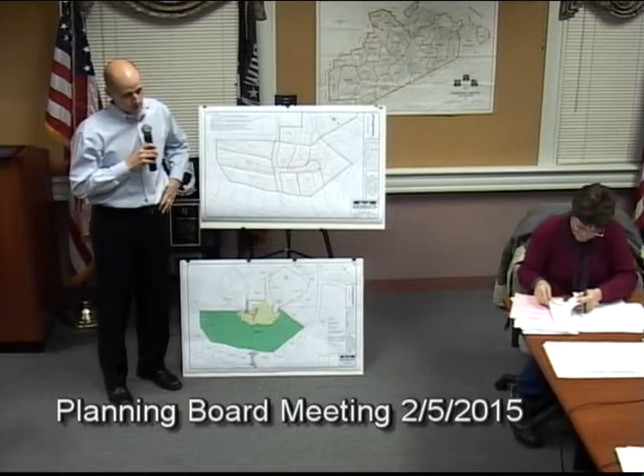We've gone ahead and looked at 3 more options in addition to that. It's a combination of conventional options and open space options, and also a combination of through roads and non-through roads. I'll go through one by one, and then we can discuss. If you have any questions about a particular option as I go through, feel free to ask.

Option number 2 is a conventional plan, but it's 9 lots instead of 11 lots. The way we could justify that is we're able to eliminate one of the roads, the road that parallels Mountain Rock Lane.

Taken into account here is the assumption that we'll be able to go with some of the low-impact development construction techniques that we talked about at the last meeting. Reduced pavement with integral bituminous berm instead of sloped granite curbing, going with roadside swales instead of catch basins — things you've done on past projects that allow infrastructure costs to be lowered, thereby offsetting some of the lost value with the lots eliminated as part of this proposal.

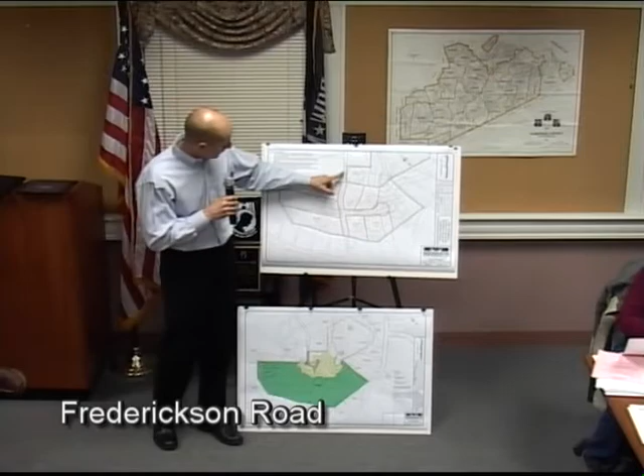This does involve a through road connection from Oakview to Frederickson. It's the same Road A. It's a slightly different version of Road B, with the lot geometry a little more roomy — I changed the orientation of that road a bit more to follow the top of that ridge out there. But it's essentially very similar to the preliminary plan we filed, minus this road stub here.

Okay, that's option 2. Option 3 is an open space concept.

This is about as tight an open space development concept as you could come up with. The open space bylaw basically allows us to go down to 20,000 square foot lots, averaging 100 feet of frontage with a minimum of 50 feet in any given lot.

Obviously, the areas we'd target for open space preservation are the wetland areas in the northeast corner. There's an isolated wetland in the northwest corner of the property. Because of how your bylaw is written, the percentage of wetlands in the open space parcel can't be higher than the percentage of wetlands in the existing parcel.

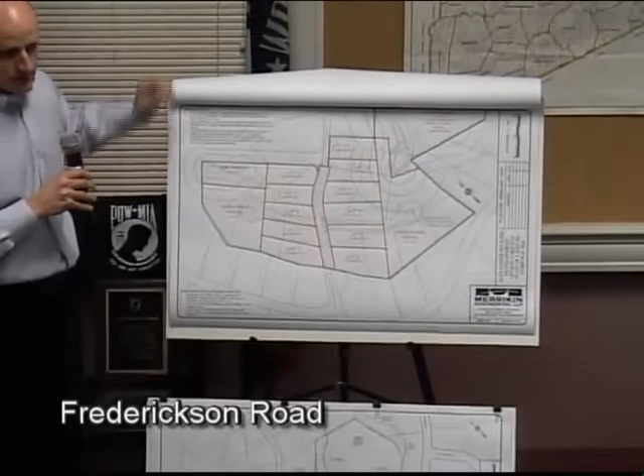So we'd have to carve those two off by an ANR plan first before we did this, and set them aside. They'd be excluded from the development package — just a set-aside, unbuildable parcel of land, both of those. Then what's left would become the open space parcel.

Here we just have 1 through-connecting road, no stub roads, and we have 11 open space lots, with an open space parcel to the west and also an open space parcel to the east.

Taken in total, nearly 60% of the total 17 acres would be set aside outside of lot development areas as part of this proposal. Again, this assumes we'd be implementing low-impact development techniques for the construction of the road — reduced pavement width, bituminous berm, roadside swales, things like that.

We'd be looking to decentralize our stormwater management patterns. Would anyone other than the people living in these houses access this open space? We could implement trail easements. We could also implement some access strips if needed, in fee. One of the two could certainly be implemented into this particular plan.

One of the restrictions with the open space development, and I mentioned it last time, is that the applicant was not really keen on the open space development concept. They weren't thrilled with smaller lots and a more congested development.

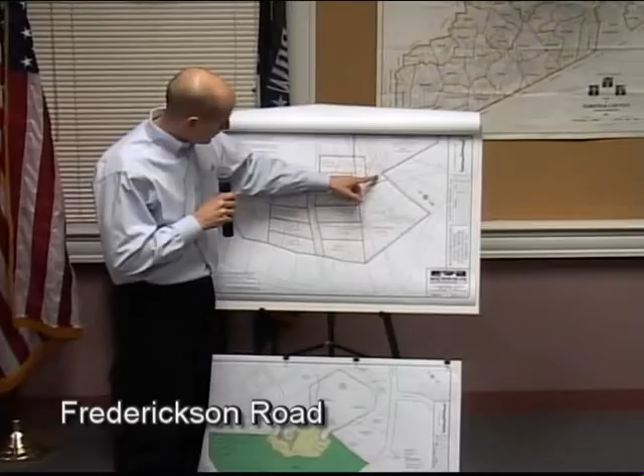One of the things we have to contend with in open space is a mandated zoning setback to this surface water body, which is an old farm pond. There's a 200-foot structure setback to that, shown here as this green line.

So we're not able to put a structure inside of that green line, which means lots 10 and 11 become constrained. The house would need to be close to the street. It'll work and it'll fit, but it is a constraint we'll work around because it's a mandatory provision of the zoning bylaw.

The third option is what the board asked us to look at specifically last time, a disconnected road system. We have an existing dead end at Oakview Trail, about 200 feet long, a little less. We'd extend that another 300 feet to make a total 500-foot long dead end on Oakview Trail. Frederickson Road, as we know, is already a long dead end.

We would extend Frederickson Road about 315 feet further, ending up with two dead end roads that don't meet. We would need to do this because of the geometry, and it would have to happen as an open space parcel development.

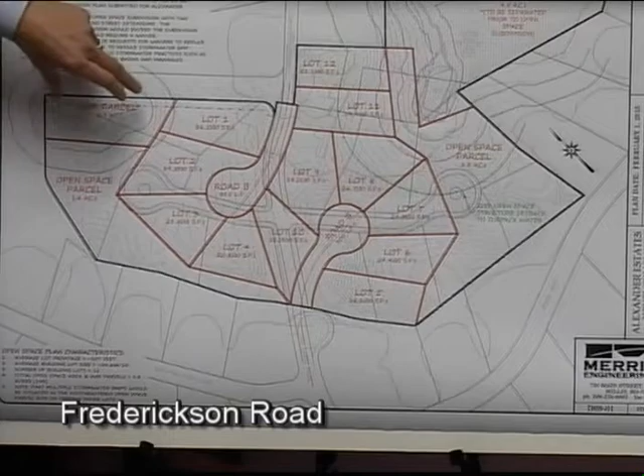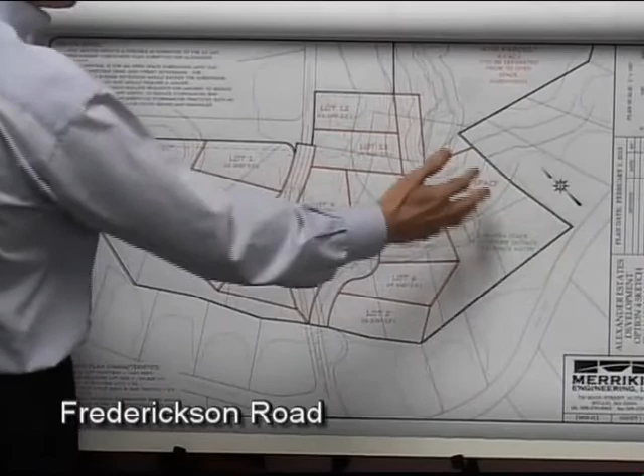So it's the same concept as option 3. You would carve out the two wetland areas as ANR lots, not part of the subdivision package, and have an open space parcel on the west and one on the east. We can connect those to the roads, tie the water main systems together through the two roads, and we could do an emergency access between the two roads if the board felt that was necessary.

So this is the fourth option, and again you'll see the green line constraining structure placement on lots 8, 11, and 12, but it works. It just means those particular houses would need to be probably 50 feet from the street or so.

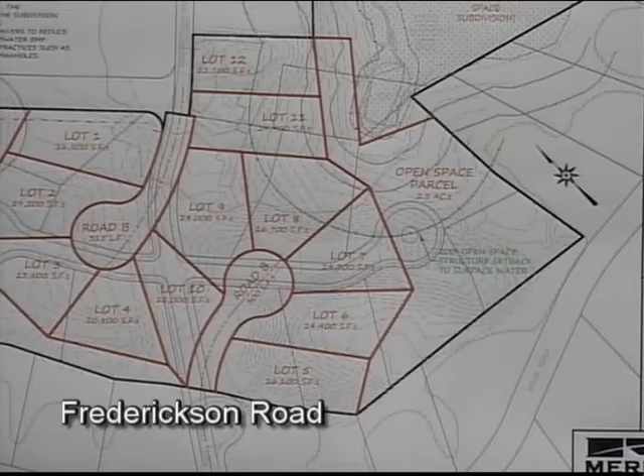You don't have a combination of the two cul-de-sacs and an open space. How does this come in — I'm not talking about that, the two cul-de-sacs. I'm talking about the original two cul-de-sacs.

Well, if you're going to open space, that's where clustered zoning would work best, on the two cul-de-sacs, because it's set aside from all the other neighborhoods. It's not just a straight row where you're going to all of a sudden get a dense area.

So you're saying have a through road and have two cul-de-sacs out, and then cluster on the cul-de-sacs. It's a possibility, but I'll tell you this area is not conducive to a cluster area because we have the wetland here.

There is some rock up here, so this would not work, but this area certainly would work to that end, which is kind of how this evolved. This type of configuration could be done as an open space configuration, certainly.

I think really the threshold issue we need the board to give us very clear direction on, and there was a lot of discussion approaching this, is whether it's going to be a through road or disconnected cul-de-sacs. That's the crucial issue that drives the design and gets us to a point where the applicant can make a decision on how to proceed.

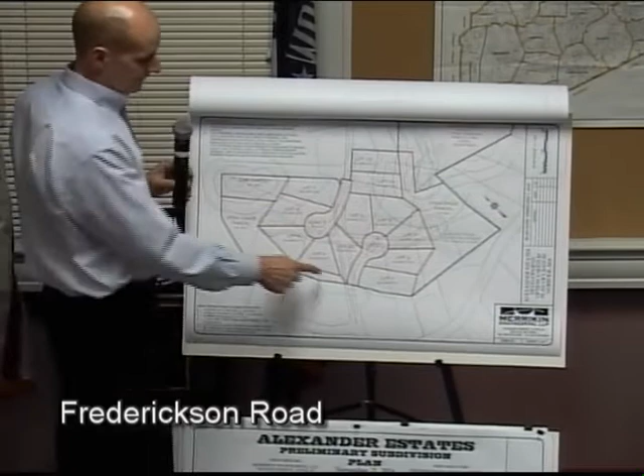So you're talking about basically reversing the road concept - making road one longer, coming in to the space where it's more level so you don't have as many cuts and fills, and then the Frederickson one, make that sort of capture all of the level graded area and even make the cul-de-sac bigger to put more homes around it.

So that kind of gets at the question John's poking at indirectly - which of these plans, including the one John suggested, has the minimum impact on the current topography? Well, the one that has the least impact on the current topography is option 3, which is just a through road.

Because it doesn't involve coming out into any of the lateral areas with any road work. You're talking about the open space through road concept, just a road connecting Frederickson to Oakview. There is no road work out here. The topography here is nothing crazy - it's just this ridge here that's the difficult part, and it's not difficult topography to deal with.

It's all sand. So this would have the least amount of impact in terms of earthwork, but the most traffic-wise, because you end up with a 3,000-foot road.

Again, this is where it comes down to the board needing to give us direction - there are competing interests here. I certainly understand the interest of the neighbors and abutters, but there are also public safety issues, and the board really needs to tell us which way the town would like this to go so we can decide which way to pursue.

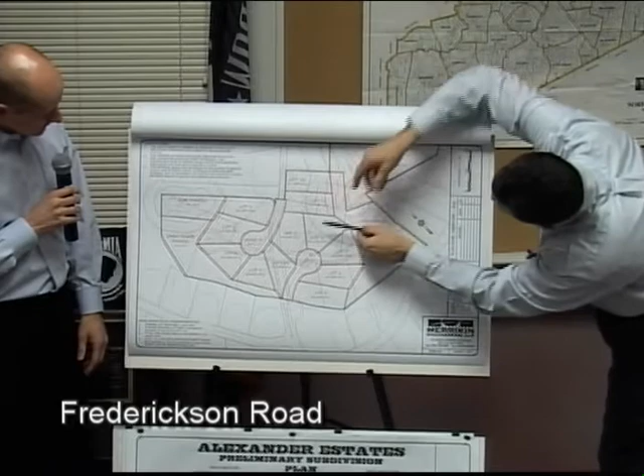So in terms of where the high ground begins, that ridge starts right about here, and it runs right through here. This is the ridge. So coming at it from Frederickson, this is really where it begins on that side, correct?

Correct, yes. So in terms of being able to put some type of roadway in here, you're saying this becomes - we can't have a structure inside of this green line. So a house has to be set back from the road a certain number of feet, I think it's 50, under the open space. And so we're constrained by that green line, and that's not something that we have any wiggle room with.

So what type of structure can't go in there? Any type of structure. Is that a conservation commission thing? Subsurface? No, I believe the bylaw intends to mean houses and sheds and things like that. Drainage, I think drainage could go in there. And it's 200 feet within what? It's 200 feet from the surface water, which is the little pond that's there. And whose bylaw is that? That is the open space bylaw, the zoning bylaw.

I'm just trying to look at this because if I was one of the folks living on either side, the biggest priority to me would be the excess traffic, the cars. And combined with the two different widths of roadway - you're gonna create a roadway with a 60-foot right-of-way that's all clear, and you're going into a 20-foot paved area that's all wooded with mature trees right to the pavement. So if you drive down there, you'll see that you've only got - as our consultant said at the last meeting, it's just a chance for people to get up ahead of steam coming out of Mountain Rock and going down, and having a sight distance problem as the road narrows in.

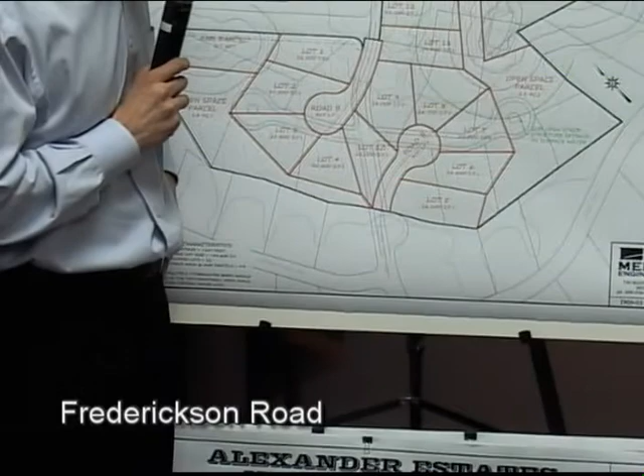How far is that green line set back from Lot 12, from the street? It's about 85 or 90 feet. So what's your setback for open space, 30 feet?

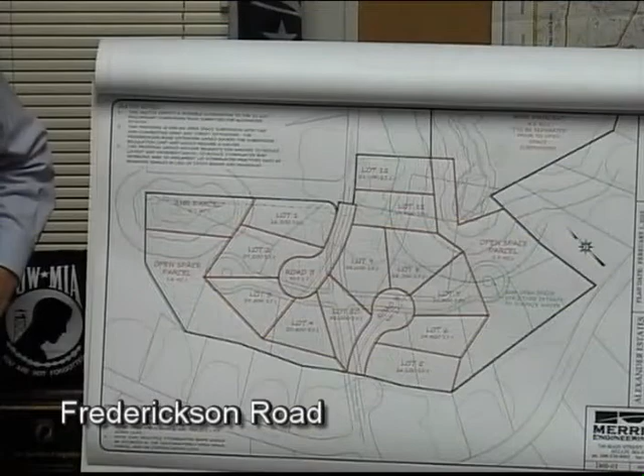I think the front yard setback is 30 feet. So if you have a 35-foot house, you still have a 25-foot backyard. Well, this is not a yard setback, it's a structure setback. So it can be inside of the green line, and that doesn't make it an issue, because if it's a 30-foot structure setback with a 40-foot house, you get 70 feet, so you can have as big a backyard as you want.

That's right, the backyard can be close to the green area. The house is somewhat close to the street, varying the distances as part of open space subdivision. Go one step further, put the house 40 feet back with a 35 or 40-foot deep house. You still got the house at 40 feet, which is almost standard, and you get all the backyard you want. I don't see that as an issue.

You'll have to see how many parcels will fit into that design, that plan, but the good news is that a lot of that earthwork, which I think would be pretty costly, you may be able to avoid. So maybe working together, the board may be able to come up with a win-win type of solution, which is what we all want.

Let me offer another thought. Can you flip to the straight-through one? Option 3, I forgot the number, but let's say it is 3. That's the one.

We touched on it earlier when we said that we generally like to put through roads for public safety reasons, assuming all other things are equal. In this case, we're hearing that there's a lot of other things that may not be equal. So this does the minimum change to the topography, provides 11 lots, and if there were a gate at the end of Frederickson, would in essence retain 2 cul-de-sacs and have emergency vehicle access through a lock gate.

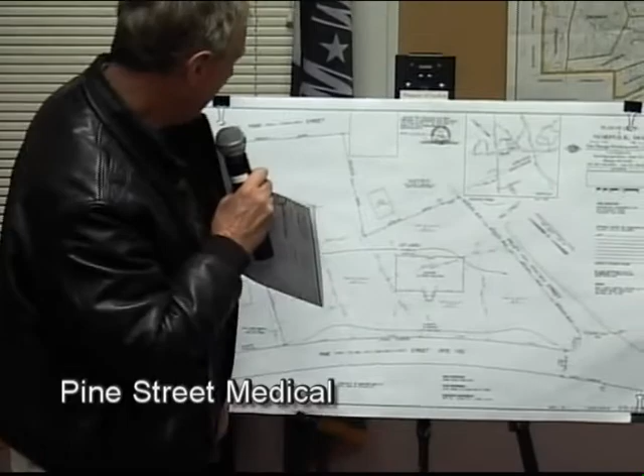This plan will combine 6 existing lots on the Pine Street Medical Building locus, which formerly was a residential subdivision that never got built. So we took these 6 lots and combined them into one for the building at the intersection of Valley Street and Pine Street. Some of you may have noticed it on your way into town - very nice looking, by the way. Thank you. It's time to get these lots all combined into one and make the building inspector a happier guy.

How come that didn't happen in the beginning? How did you build over the lot lines? I don't recall - we made a commitment to do that. At the time we were overwhelmed a bit with the Board of Health requirements, and it just got pushed aside. So we're here now to get it done.

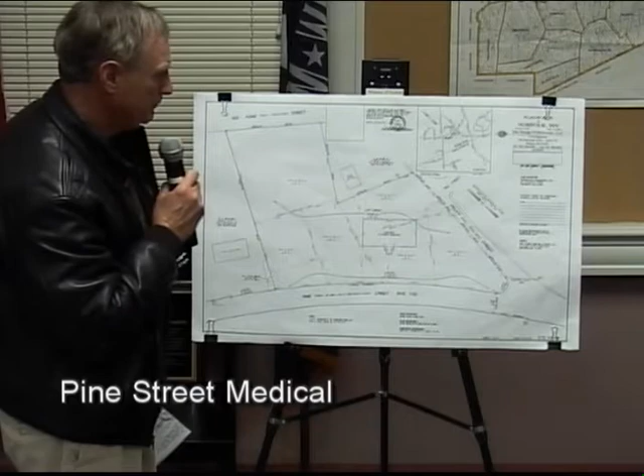Seems very logical. Right, why not do it. Gino, did you already look at this? I looked at it just a little while ago - do you see anything with combining the lots? No issues, we need 30,000 square feet and we've got almost 5 acres. So you have no comments, Gino? No, it's fine.

Since Gino has no comments, does anyone have any objection to signing the A&R? No. Okay, someone want to make a motion? I move that we endorse the A&R plan for Pine Street Medical Building, 31 Pine Street. Second. All those in favor? Aye. I abstain. So we'll endorse it - do you have all your copies here for us to endorse? We'll take care of that, I'll have those ready for you next week. Great, thank you for your time.

Toils and Farm, Fox Run subdivision. Open the hearing - John's going to have to read it. This is a modification hearing, so we have to open this one. Thank you.

Notice is hereby given in accordance with Massachusetts General Laws, Chapter 40A and 41, in the Town of Norfolk zoning bylaws and Planning Board rules and regulations. The Planning Board will hold a public hearing on Thursday, February 5th, 2015, at 8 p.m. in Room 124 in the Norfolk Town Hall, 1 Liberty Lane, Norfolk, Mass., on the application of Pulte Homes of New England, LLC, for modification to a previously approved open space preservation definitive subdivision plan entitled Toils and Farm, also known as the Fox Run subdivision. Plans by Marchionda and Associates LP dated January 14, 2015, located off Maple Street in the R3 zoning district. The applicant proposed to modify the drainage system in Warren Drive, revise lot lines for lots 65 through 68, and allow for the grant of an easement over the roads to the homeowners association. Plans, applications, and associated materials are at the planning board office and may be inspected during office hours.

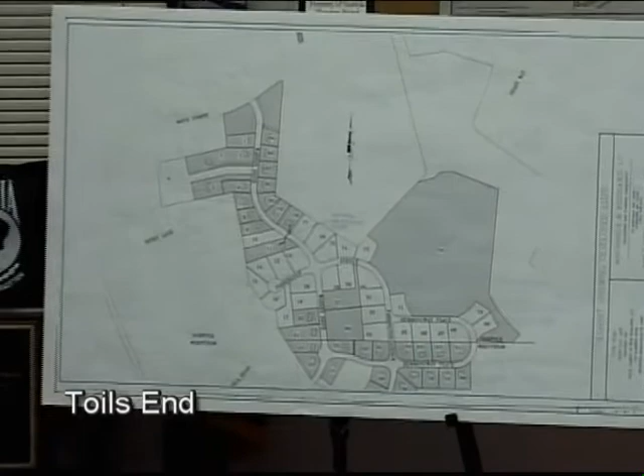So there's actually 3 portions of the Toils End subdivision modification request. Just to orient everybody, where I'm pointing to is Maple Street, which is where the Toils End subdivision has access off to. This discussion started based on the town's interest or concern over a drainage outlet of the subdivision that outlets to Warren Drive at the intersection of Maple Street, and the approved drainage system.

So we've worked with Marchionda and Associates to come up with a drainage improvement plan which would improve the situation. But there are 3 parts to the request, so Mike Rosati will go over the drainage improvement plan that we presented to the board.

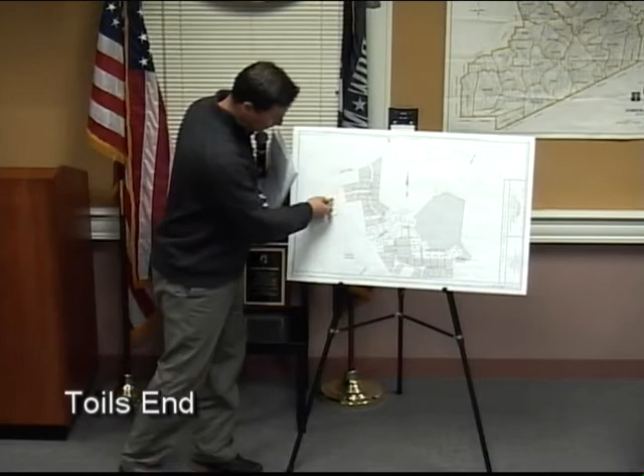The other portion of the request is that in order to accomplish the drainage improvement plan we're proposing, there's Lot 4, part of the Toils End subdivision, that we need to move. Mike's solution doesn't allow for a house to fit there anymore to effect his proposal. So we propose to move Lot 4 down to where 65, 66, 67, 68 are. There are 4 lots there, and we'd like to make those 4 lots into 5 lots. The 5 lots will still meet the necessary frontage, setbacks, and size requirements of the zoning.

So before you in your package, you have a subdivision modification plan which reflects that request. The third item is to allow a grant of easement over the roads to the homeowners association. The basis of that is the sewer system associated with Toils End is a privately owned and maintained sewer system that all flows down to a privately owned and maintained wastewater treatment facility regulated under the Mass DEP, Department of Environmental Protection.

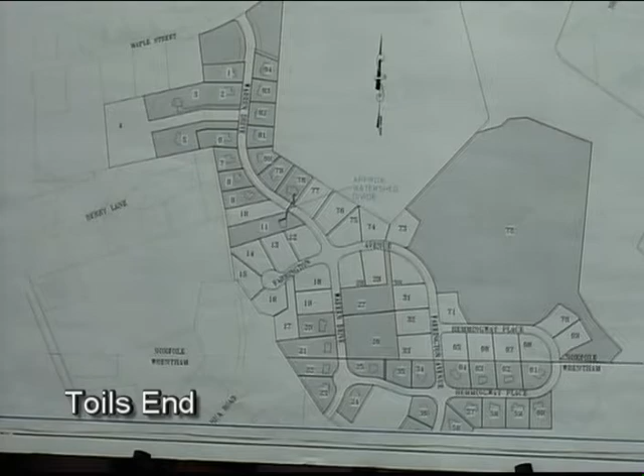When the initial draft grant of easement, a deed and grant of easement to the town, was drafted and submitted to the board at the beginning of construction, that legal document omitted the sewer system and didn't contemplate its ownership and maintenance. So we've submitted to the board a revised quitclaim deed and grant of easement. Our attorney has submitted a revised document, and town counsel is reviewing it now. Essentially, the change grants an easement to the homeowners association for perpetual ownership and maintenance of their private sewer system. That's the third request of the modification.

And the first request—I'll call Mike Rosati to come up and walk you through the drainage improvements we're proposing. Good evening. Well, I hope you've got pictures. Yes, we do, plenty of pictures.

While this sketches up, I'd like to elaborate a little bit on this. This is the area of concern that was expressed to us. This blue line here is the high point in the subdivision. Everything on this side of that line flows down to a basin at the end of Hemingway in this area. Everything on this side flows down to this outlet on Maple Street. The concern expressed to us was that there was too much water coming down Warren Drive and discharging at this point just before the wetland, causing some erosion.

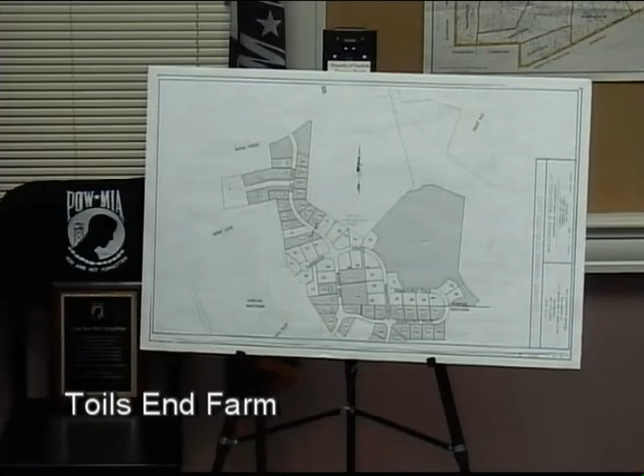The area in gray represents all the lots in the subdivision that are developed and have houses on them. The white areas have not been built yet. From this blue line down to Maple Street, there are only 2 areas in this watershed that were available to us to resolve this or improve this situation.

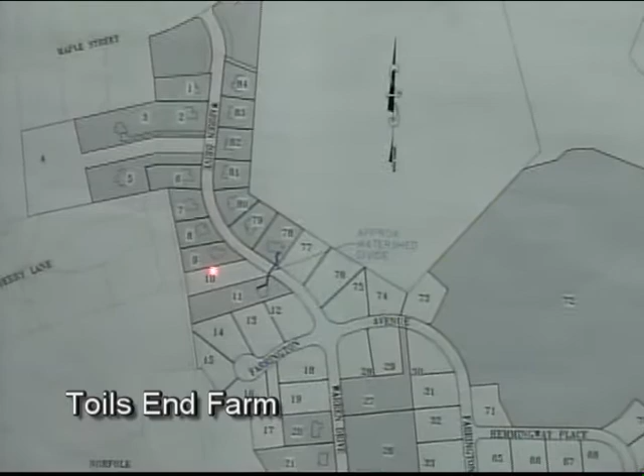Lot 10 is one of the areas. The problem with Lot 10, which we did not pursue, was its relative position. It's located at the top of the watershed, so we couldn't get anything to work there that would be significant.

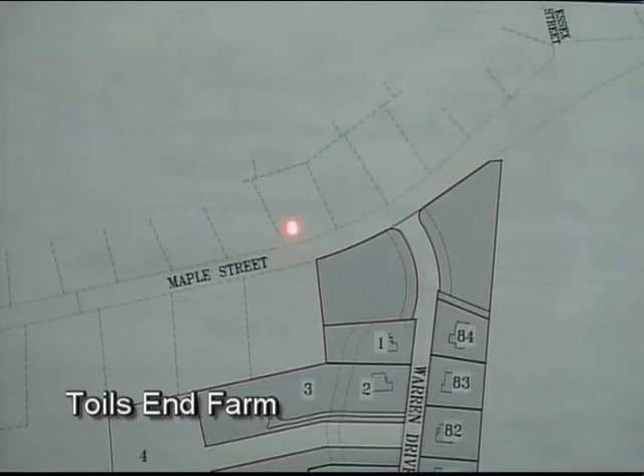We were left now with Lot 4. Lot 4 again has some limitations, but our approach was to try to divert as much water from Warren Drive into Lot 4 and discharge it in this direction, allowing the rest of the water to flow down to where it does now, hopefully grabbing enough water off of Warren Drive so that the flow at this point met what currently got there, or got there before the development happened.

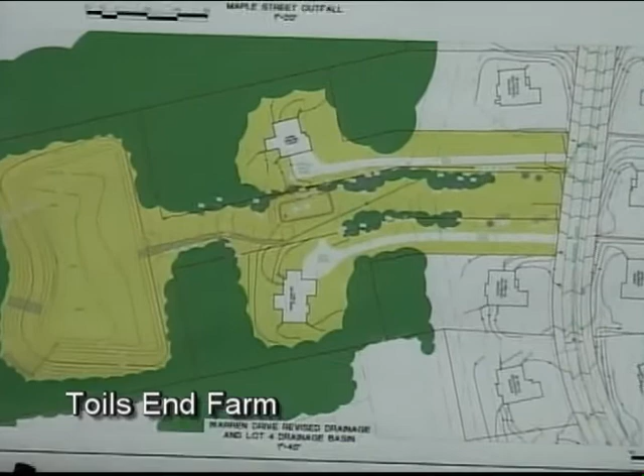There's still some trees left here in green along the boundary, which we kept when we were cutting the lots during construction of the road. I tried to consider that in this proposal and keep as many trees as possible. For the most part we'll be able to keep most of these trees, though there may be a couple here that have to go, depending on how deep the actual ledge is when we trench for the drain.

We have proposed this pond so that there's no increase in runoff in this direction down to Maple Street, and we have a similar flow coming off the site here as we had previous to the development.

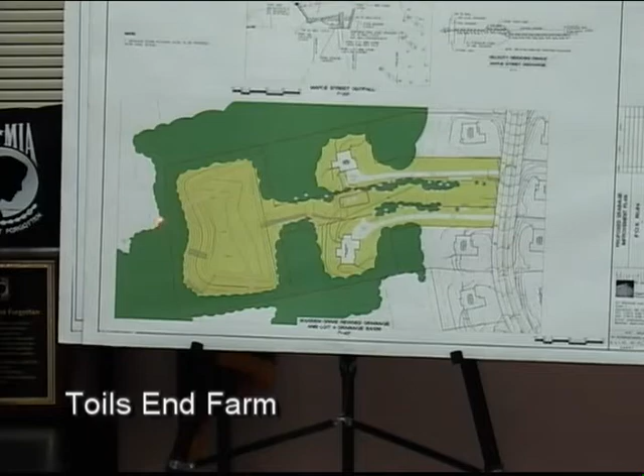There were some concerns about water quality in this area of the subdivision. What we've proposed is the water will come off the road into a water quality treatment unit, basically a grit and oil separator. Then we're proposing to bleed it off into a rain garden here, where it will treat the runoff, then come out of the rain garden and flow back into the pond, at which point most of the water in this pond will rely on recharge into the ground versus flowing out of an outlet structure.

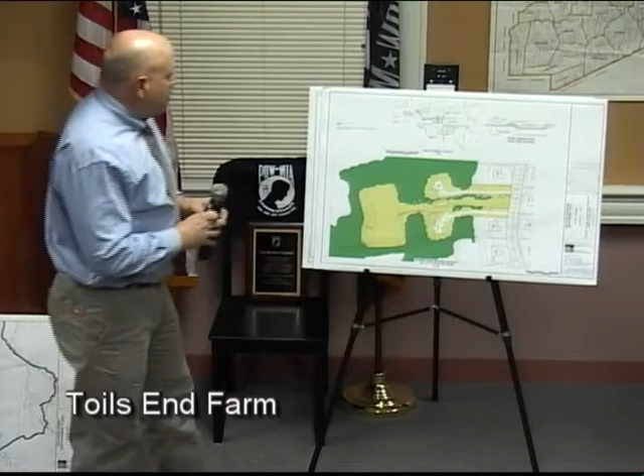With the remainder of the flow going down to Maple Street, there's still going to be some flow, so we wanted to try to improve on that area of the project also, which is what's represented up here in this square.

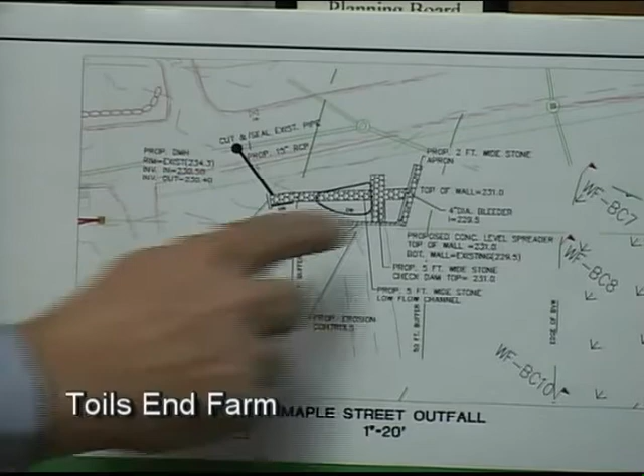This is Warren Drive here, and the drain lines from Warren Drive come down to a manhole here, and to a manhole here in the existing culvert that used to cross Maple Street, or that crosses Maple Street. This is where the discharge is currently occurring, and this discharge point is very close to the 50-foot buffer to the wetland, which is over here.

What we wanted to do was pull this discharge away from the wetland and try to improve it a little bit. So we're proposing to place a manhole in the existing drain line here. From here going to here would be discontinued, and the water from Warren Drive will flow on its own into a discharge point here, which is over 100 feet from the wetland.

What we're proposing is a riprap velocity reducer combined with a level spreader, basically a small retaining wall which will allow the water to build up behind it and flow over the top, like a waterfall, into a riprapped area which will spread the water out instead of having it come down in a very confined area. We're able to do all of this outside the 50-foot buffer.

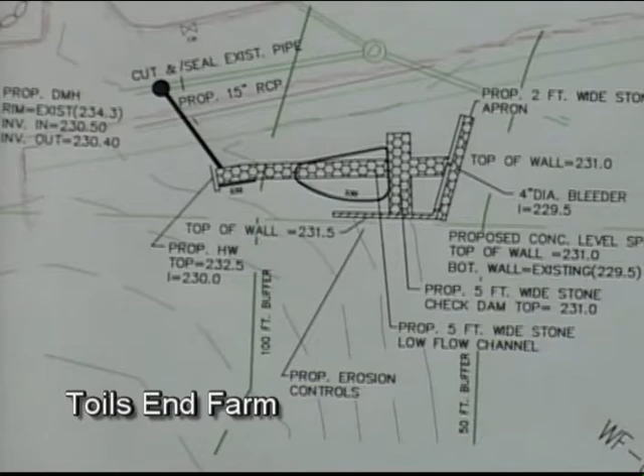This will require also your approval, and also the Conservation Commission's approval. We have filed a notice of intent with them on this part of the project.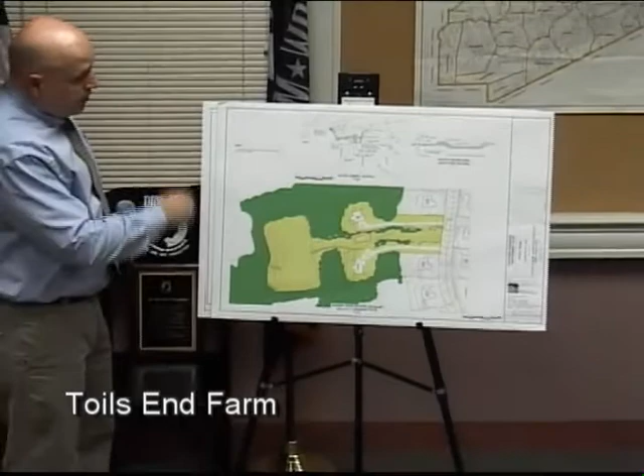So this here is a cut view, or a profile view, of what the discharge point is. This is the pipe coming from the street. This is the riprap, we're going to make it level, and then we're going to have a stone berm to try to reduce the velocity here. And then this is the retaining wall that we're talking about.

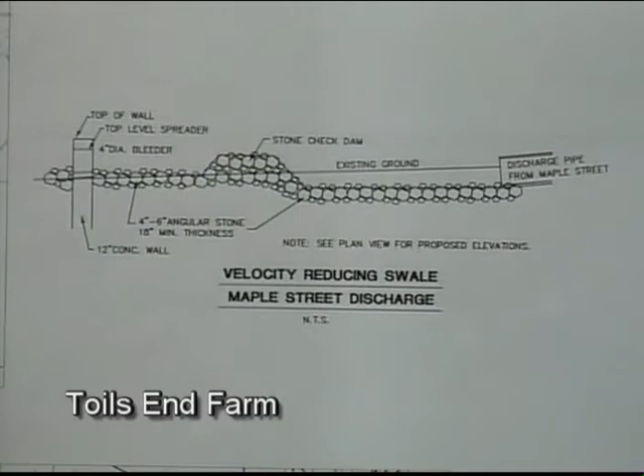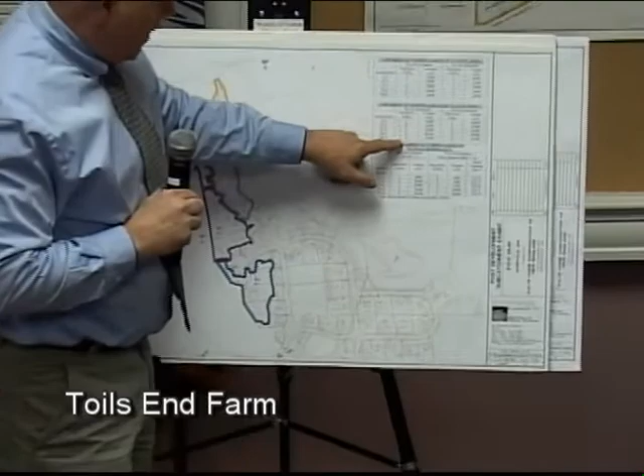How much volume is down there with this layout compared to what's going down there now? So what we've accomplished is we've reduced it - obviously it varies per storm. In the 2-year storm, currently you're getting 9 CFS down through that area. We're going to reduce it to 4, so it's more than half. In the 100-year storm, we're projecting 29, and we're talking about 15.

So 9 is overwhelming it. But what's there now? It's overwhelmed. With what volume? Right now it's overwhelmed with, I guess it could be 9 CFS. We probably had more than that going down there in those big rainstorms we had - and that was without the other drainage system, without picking the other half of drainage out. You've cut the volume pretty much in half, haven't you, Mike?

Yes. Are you removing the existing outlet pipe that's there now as part of the reconstruction? No, the reason we're not doing that is there's this pipe we were talking about that existed where they tied Warren Street drainage into - it drains a low spot on the other side of the street. So if you got rid of the pipe, this would cause flooding on this side of the street.

So what'll be coming out of the pipe that's there now? Just what comes across the road. That's it? That's it. Nothing else from Warren Street? Warren Street's going to be completely disconnected from it. It's going to be on its own system, if you want to call it that.

So it does traverse Maple, basically gets to the other side, and there's a culvert that brings it back. There was a culvert here that came across the road, and the design for Toils End Farm called for the drainage line out of Warren Street to connect to it and replace this from where this manhole hit that pipe to the wetland with a bigger pipe. That's what was proposed in the plans. So we're going to leave it, but we're not going to use it - it's just going to take whatever flows across the road.

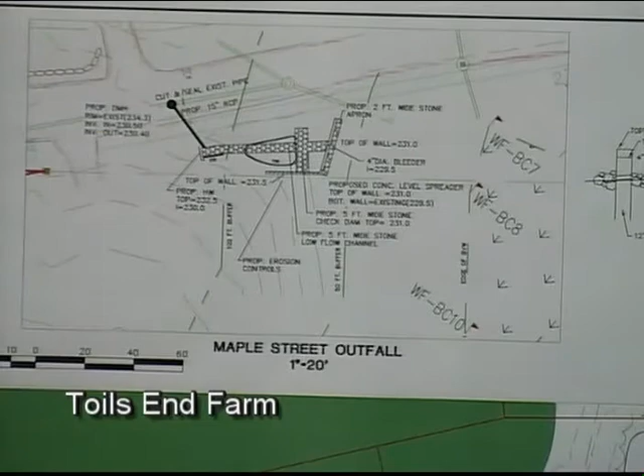And John, you've reviewed that in detail, right, as part of the Conservation Commission review? Yeah, we're about to review the new plan at the hearing, but I've already seen it, and there's minimal extra work in the resource area. Like I said, from what the report says - and I think our consultant will tell us in a minute - the volume was cut in half and the water quality is exceeding the state requirements, especially considering this is a critical area, so the requirements are more stringent, and they've exceeded those by 8%, 9%, 10%?

Yeah, I think it was 80 to 88, or something like that. Yeah, right, it was 88, I believe. Okay.

Sorry. So one of the things Mark mentioned was that we were going to allow for us to do what I needed to do on Lot 4. We had to move the building site for Lot 4. This plan represents Lot 68 here, and Lots 65, 66, and 67 were in there. This is what the lots will look like under this current proposal. So we've shown houses that Pulte builds with grading, and it fits in rather well.

So is this going to be a separate A&R plan, or are you going to incorporate this into the subdivision? I don't know how the board wants to work that - we could do it under A&R, or we could do it as part of the modification. I've got a plan for that, as part of the modification.

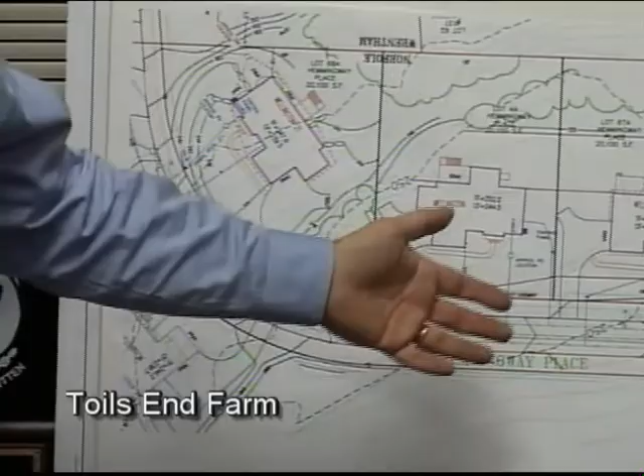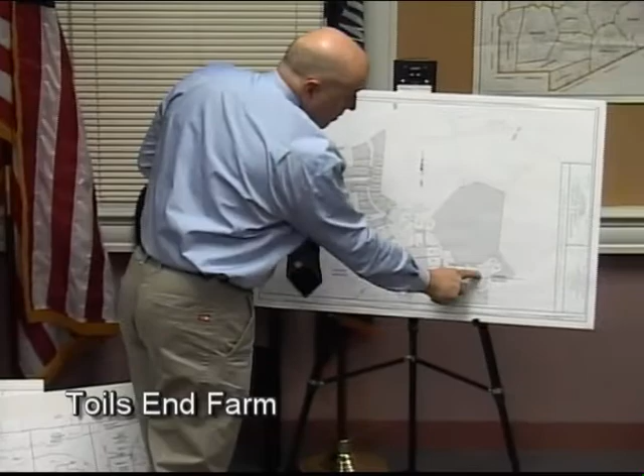Can you show me where that is on your larger scale plan? So it's right where the throat is? That would be these lots right here. Remember that loop where one side of it is in Norfolk and the other half is on the other side, in Wrentham - that's the town line. That's what confused us, right? It was lot 68, right there, upside down, and this is lot 65 here.

What are the sizes of those new lots? They're 20,000 square feet. There was just about enough area left over between those 4 lots to make another one - 4 lots to 5 lots.

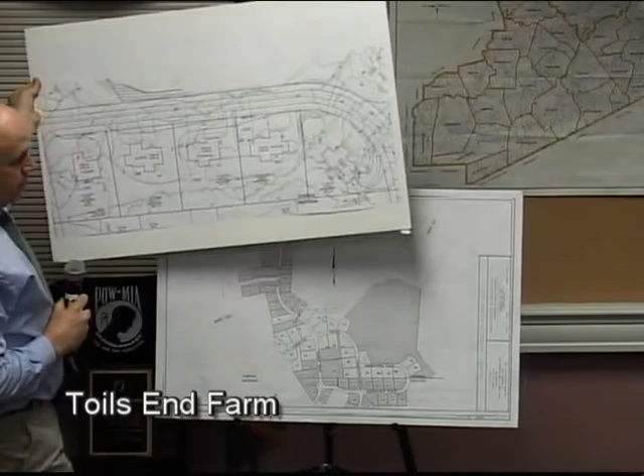And that was really why we chose the area. So the shaded ones are Wrentham. You can tell.

So we did get a review from your consultant, and I've looked it over. I haven't really had time to really get into it, but I didn't see anything that was really of major concern to me, relative to their review. Well, maybe we could hear from our consultant right now.

Certainly. Do you prefer that I read the comments into the record, or do you want just the highlights? Yeah, well, just the main points, Steve? Yeah, major ones, not just. Yeah, I don't want to physically read them all in if that's... Why don't we have him introduce himself, too? Yeah, that would make sense. Thank you.

Andrew Ogilvy with Beta Group. So we looked at the submittal, the drainage modification submitted by the applicant. And the major things we noticed were, we'd like to see the calculations that were done for the water quality unit that is in place now, that treats the water that goes to the discharge at Maple Street.

That was, I believe, approved in the original subdivision plan, but those calculations weren't made available to us. We expect they're decreasing the flow by about half. I don't expect there's a problem with that unit. We just would feel comfortable if we could verify that everything is as it should be.

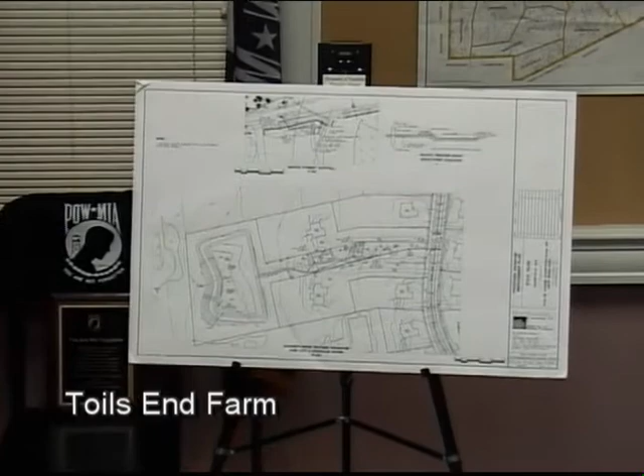Now, on this detention pond, the overflow goes to the adjacent parcel, correct? That's right, yes. How large is that adjacent parcel, and does it go directly into wetlands? No, the wetland is located at the corner of Maple and Park, I believe. It can't go directly to the wetlands. There's wetlands down there, but it's not going directly into it. Where does it go through, just into the woods? It's going into riprap, it's gonna be 100 feet off of the wetland line, so the volume going out isn't gonna be able to encroach past that.

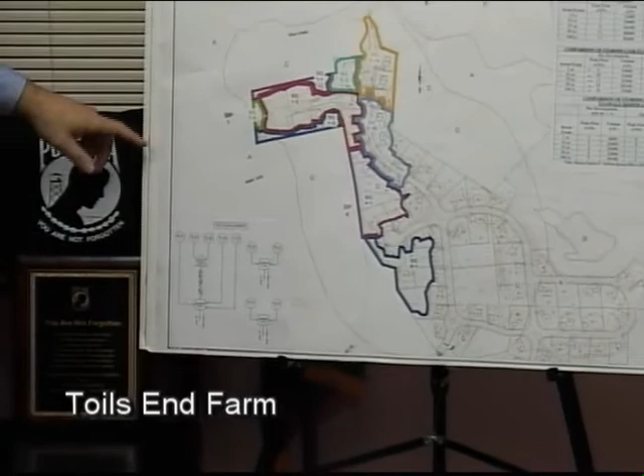That's the whole theory of this plan. I believe the wetland is where my finger is, something like that, to give you some idea of the scale. There's a house here, there's another house here, and I believe, I'm not sure, there might be another house here that the wetland abuts the side of. Is this runoff going to go onto those house properties? I don't want to hear neighbors saying that the detention basin's flooding their backyards.

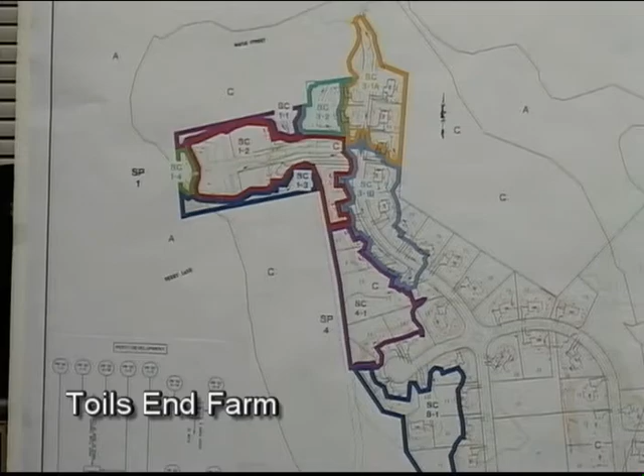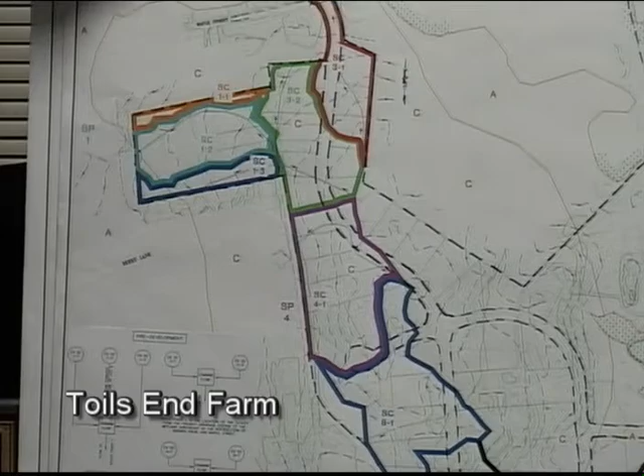Neither do I. So what we did in the process of coming up with this design, in the pre-development phase, we defined a swale that runs down through here, you can see it in the contours. Already existing. So we defined what that flow is from the subdivision before it was ever built, and we tried to keep under those numbers, and then some. If you look at the calculations, the flow out of the basin itself, like I said in my presentation, most of the water is being infiltrated into the ground. We have less than 1 CFS coming out of this pond at any point up to the 100-year storm, and we have no flow out in the 2 or the 10-year storm.

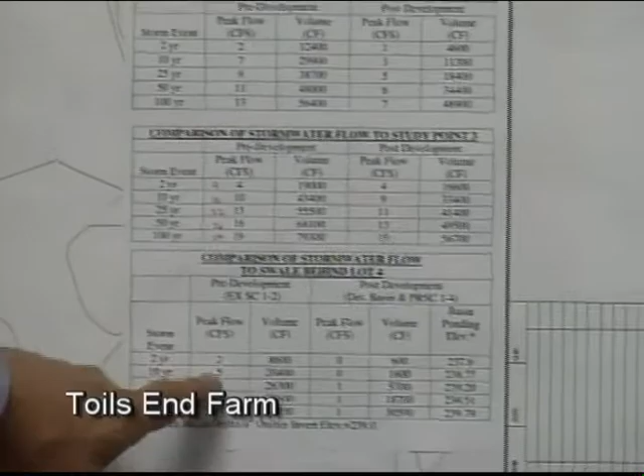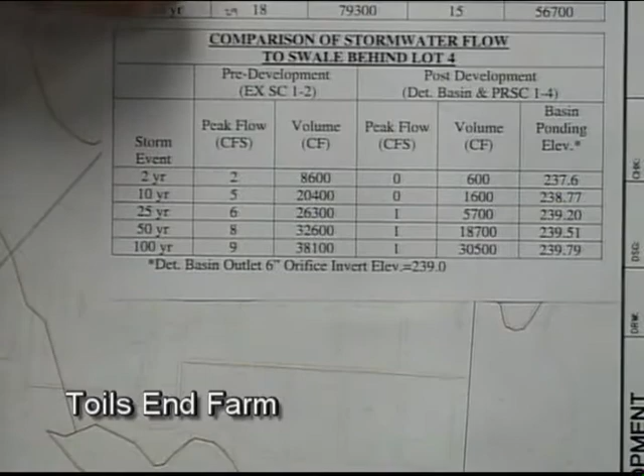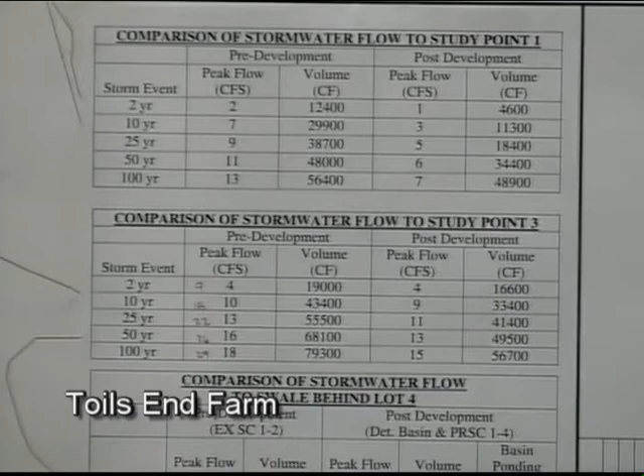So we're trying to get water out of this by going into the ground and actually flowing through the culvert, hence the size of the pond is reflected in that. So how many CFS going through the swale as it exists now, or existed before you started development? In the 2-year storm, there was 2 CFS. We have 0 coming out of that—sorry, that's the wrong chart. 2 CFS in the 2-year storm, we have 1. 13 in the 100-year storm, we have 7. Now, this is total flow, so this would be not just what's coming out of the pond, but what's going by Lot 5's house, Lot 3's house, and what's below the pond itself, all added up together. But these numbers here, as I was telling you, 0, 1, 1, is what's actually coming out of the outlet pipe that's here.

You accounted for the runoff from the houses and the driveways on Warren Drive? Yes.

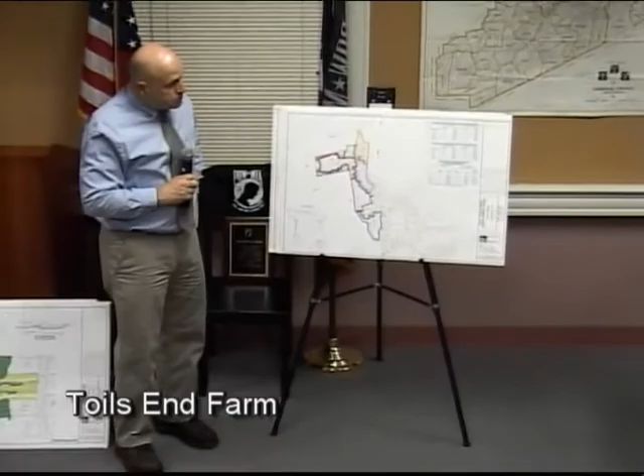How about the elevations with mounding and such for the detention basin versus the adjacent property? Can you give us any feel for relative elevations?

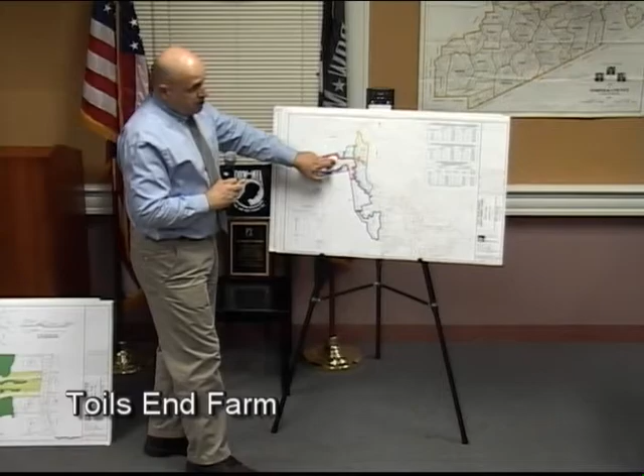I'm not sure if I'm understanding the question, but the elevation of the bottom of this pond is likely going to be 136 to 138. On Lot 3, the backyard is at about 144. Same thing with Lot 5, actually, it's a little bit higher. Obviously down here it's lower, off the site, and it continues down.

Any idea about how much lower that is? There's a pretty good slope that comes down here, so between here and here, at least 20 feet in elevation, that it's lower.

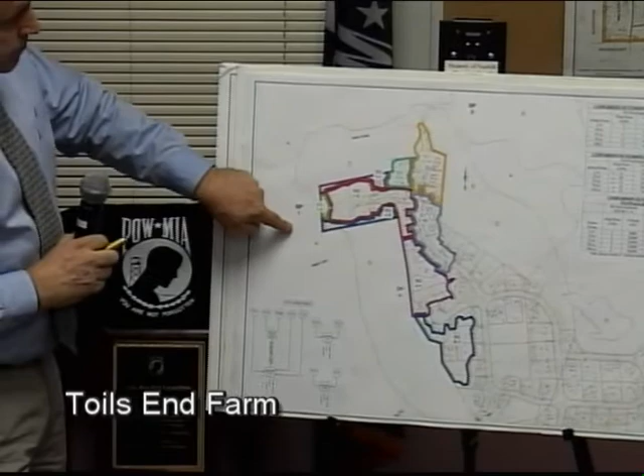And in terms of proximity horizontally? Pretty much the slope goes across like this, it's pretty constant across. Except for this first lot, it's actually up a little higher than the woods, probably 6 or 8 feet.

And that's also where the well is located for that house. Okay, so the well is there. And how about the basement of the home, about how far to the detention basin? From the well it's 200 feet, so I'd say it's probably 220 to 225 to the house. And I believe the cellar floor would be above this discharge point.

How can the cellar floor be above the discharge point if the land is 20 feet lower? That was down in here. This house is over here, and it's higher in elevation than right here.

Yes, sorry, one comment I had made in the letter that I didn't address: I don't expect it to be an issue, but we did ask that they provide a mounding analysis to verify that they're not impacting those neighboring properties.

Excellent. It looked like you also asked them to consider the level spreader at the discharge to prevent channelization. I think I would use stronger language than consider. Shall. Fair enough. What they've shown is a riprap channel that kind of runs cross contour, and a level spreader might be a more effective means of distributing that flow. Their calculations show it shouldn't be that much flow to begin with, but spread out what's there.

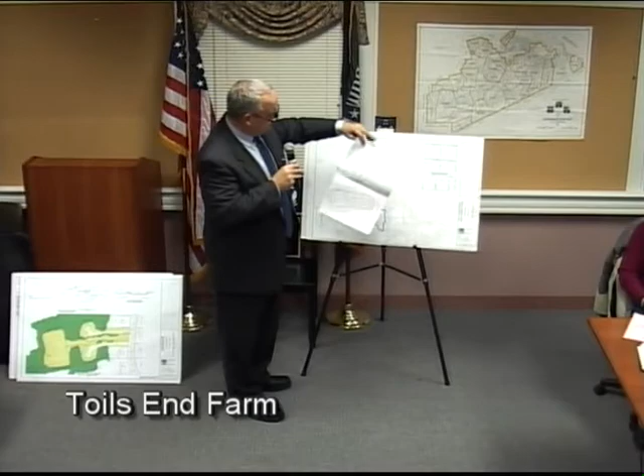This red dotted circle is what's been cleared in anticipation, I believe, of building a house there. And the blue dotted area is what they're going to have to clear to put the detention basin in. So it's going to have a major impact on Lot 3 and Lot 5.

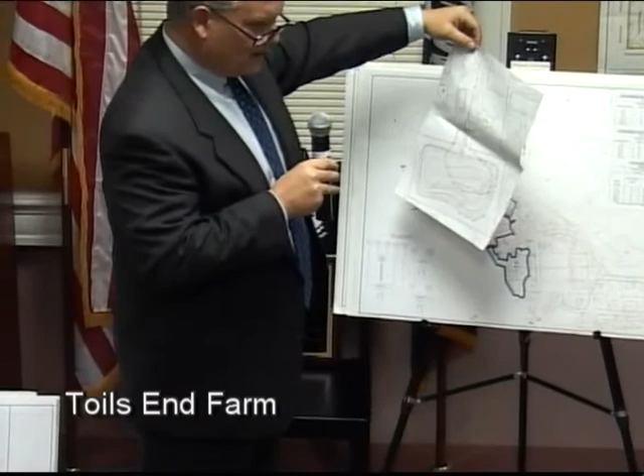With the topography of my client's house, it's sort of in the back, it's a walkout basement, and then it goes up 2 full levels. It's already a lot higher than this. So any landscape proposed to mitigate it, if it's mitigated with 6-foot trees, well my client's house is already 20 feet above that. So 6-foot trees are not going to help them very much.

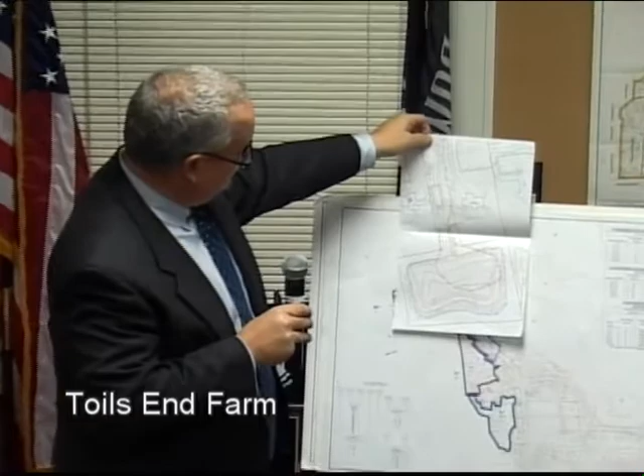But I think this just shows it kind of in all its sort of stark impact on the direct abutters.

I think the situation we face, and John has invested more time than any of us here at the table in this issue because he also sits on the Conservation Commission, is that the developer, Pulte, needed to locate a parcel at a sufficient elevation to be conducive to the removal of water for a sufficiently long section of Warren Drive, so it doesn't really leave many options. So I think at the end of the day, something really needs to happen at that location. There's a question as to how much it can be modified in terms of landscaping and some other things, but I don't know that there's an alternative. Gravity is a funny thing, it works one way, and we're not going to change that.

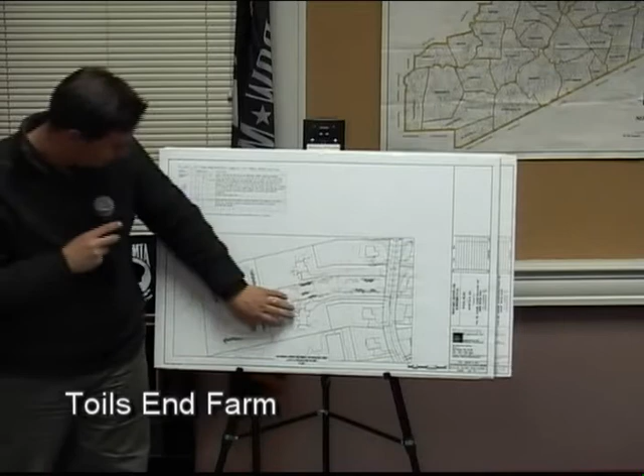Mr. Chairman, if I may. First of all, I did meet with the owners of Lot 3 and Lot 5 earlier this week. I tried to give them the courtesy of the proposal of what we were proposing, and I appreciate Eileen's and Peter's comments and concerns and their attorney, Jeff. I do appreciate your concerns and comments, and I just wanted to let you know that this is a perfect forum to express those, and we do care about our customers.

So you're going to make them happy? Well, there's only so much I can do, right? So I will try. I'm trying.

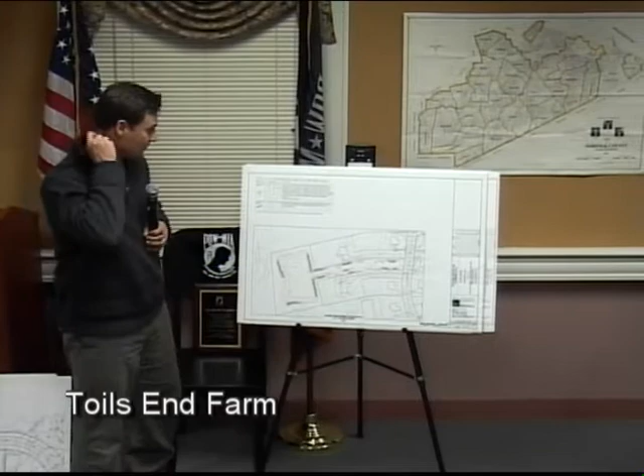What I wanted to show the board is one of the concerns that came up at our meeting was the view of the aesthetics of the basin. So I worked with Huntress Associates, a landscape architect we've used in the past, and I explained some of their concerns about their view as they drive in off of Warren Drive of the neck of Lot 4, and also the rain garden located adjacent to their homes, and then the third aspect of the design is really the large basin. So I tried to work with our landscape architect and express their concerns and come up with a...

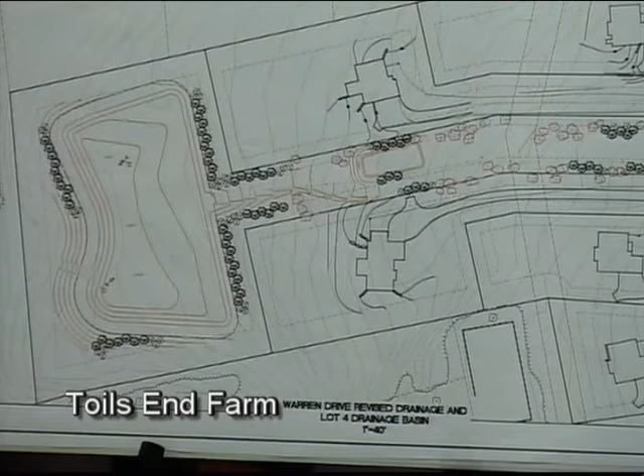A screening and buffering exhibit that I could present to Eileen and her husband and Peter and his wife, as a way to mitigate the aesthetics of the basin if they didn't like that. So what we've proposed is some heavy evergreen screening with some ornamental trees to break it up along the rear.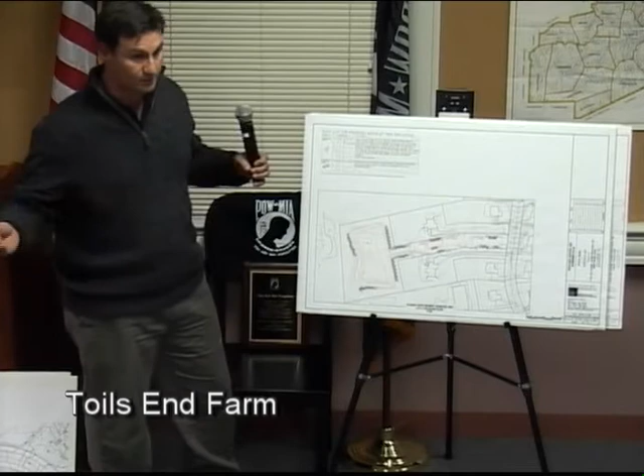Right now there is a proposed 4-foot-high black vinyl chain link fence, which we find really disappears in the woods in a setting like that. But to break up the fence, which we had discussed at our meeting, I proposed putting these evergreen trees in front of the fence to break up the fence line and also break up the view of the basin. Same for behind Lot 5, we had a similar line of screening plantings, and then also along their side lot line towards the rear.

So essentially, what I'm doing is trying to the best of my ability to block their view of the fence and block their view of the basin. But they're up 16 feet, which means they're looking into the canopy of all the woods between their home and the basin.

Do you understand that whole basin? If you have the time, I'd be happy to show you a basin around that size that I built in Wrentham off of 140 that's in existence now. The level of extent is up to you to make them happy, make the board happy after all this nightmare that's been caused, but you don't have to do the perimeter with a fence and evergreen trees.

You can take plantings, wetland trees, and make that whole basin a focal point, so you have people with benches that want to come sit around there. You can have birdhouses in that basin. You can have a bunch of things to make that thing a focal point, which I've done in the past, to make that really work and bring people there.

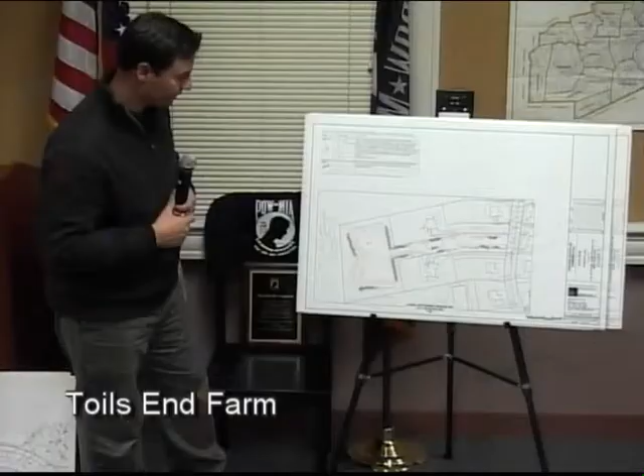Well, one of the other things I'd offer, and I'm sure I'm just going to beat them to the punch, is one of the things they expressed is they certainly don't want this to become a walking trail, and now all of a sudden this becomes a focal point and you're encouraging people to come back here. Because one of the alternative arguments is now that there's no house there, and no driveway, and no homeowner who can do whatever they want with their lot, and their children and family and guests, there's a side argument that having a basin back there may be better than having a neighbor behind you.

I guess it's perception. I'm not here to have that perception argument. But I do know for a fact, if you don't have a limit on putting 10 or 12 blueberry bushes in the middle of that basin, we can come up with a plan, and they use a landscape architect. Very good, because by the size of that basin, from what I've experienced, I'm talking in the range of a couple hundred plants and trees to make that work.

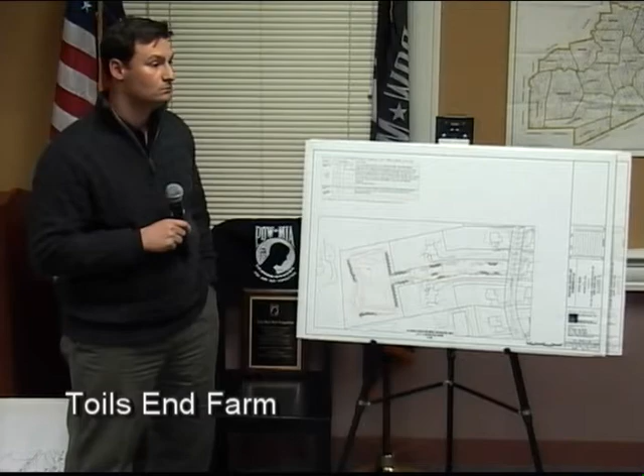So what I've proposed so far is there's 114. But you wouldn't need the black fence, right? I think the black fence is there because of the 3 feet of water. Yeah, it's a regulation we have for safety.

But I think that could be pretty much covered by the starting point that Mark has here. You could make that inside a park-like area with plants that'll survive having 3 feet of water for 2 days. Yeah, it costs money. I'm not arguing.

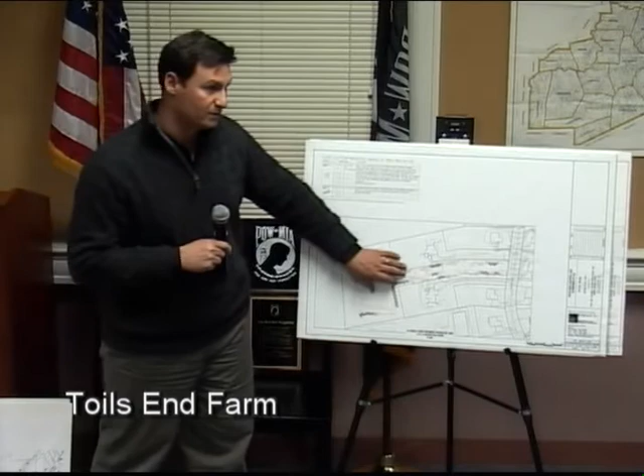All right, just let me step back. This was not a final plan. The reason I stood up was just to express to the board that we've met with them. We did hear their concerns with aesthetics, and we did pretty quickly come up with a screening plan to start showing our responsiveness. And there is a note on Mike's official plan that he submitted to you that says, once the basin is in its final state, we'd be happy to present the board with a planting landscaping plan. So we always intended to do that, but we didn't want to do that before we had your concurrence at this meeting.

We may be on a different page of what the landscaping plan might look like. In that basin, how long and what elevation are the slopes at?

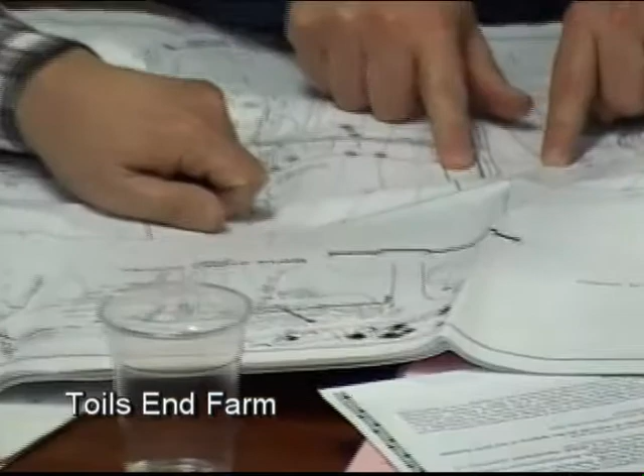The basin matches the topography, the bottom of the basin generally matches the topography that's there now. Coming up the two sides, the slope is 3-on-1. The side slope to the top here, or the bench, is how much? 3 feet, 8 to 10 feet, coming from the start of the slope up to here? Yeah, it's not even that, it's 5 or 6.

Point being, the plants and trees that won't survive in the bottom of the basin in the water, you can plant them on that side slope or on the bench to give them more proper coverage.

Because the bottom is sloped, the depth of water at that end of this pond isn't that deep. And that's what we got to work with.

Just as a side note, Mark's not taking credit for a small thing here where he instructed me to keep 25 feet of natural trees between 5 and 3 along that property line. I didn't bring the pond that far up the slope for that reason.

I personally think you've done a great job designing drainage in a street that's already built out. And I'm happy to hear that Mark is going to help the two neighbors make this right. It can be made right. It's just a matter of the will and spending the funds to do it.

So I think you folks should be part of the process when it comes before us, to go over the landscape plan and get a feel of what they're offering to do. Give me the addresses to the places.

Go right ahead. Just to address, my name's Peter Crowley. I'm the owner of property number 5, 225 Warren Drive. And I appreciate the comments about working with the abutters.

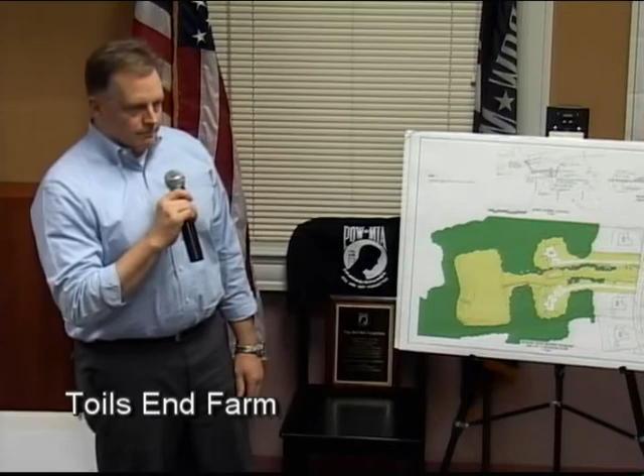I guess the question is, does everyone understand that the situation that exists right now can't continue from a wetlands standpoint, in terms of the damage being done? That's the bottom line. Something needs to be done. We're already at that point. It's just a question of what the options are. I'm not sure, from a macro standpoint, that I see an option to what's proposed.

However, it's certainly realistic to think that modifications could be made to mitigate the effect on you folks, and then it really becomes a matter between you and Pulte, not so much you and the planning board.

Who's going to require them to make these modifications? We can ask as much as we want, and they can promise as much as they want, but essentially they've told us they're going to have a design we approve. We can write it into our decision. John's saying give us a list, and then we'll try to incorporate it. I think that'd be very helpful.

I think another concern is that having 3 feet of water standing in our backyard for possibly 3 days is going to be potentially a public health issue. I'm a veterinarian - Eastern equine encephalitis, Western equine encephalitis, and there's a horse farm in the middle of all this too. I think that's a big problem.

And again, we don't want it to be a public way - this is our backyard. We don't want people walking on our backyard. I'd like to see it as beautiful as possible. I think your idea is great with bluebird boxes and blueberry bushes and all sorts of things - that would be wonderful, but we can't compel them to do that. If you can, that would be great. But again, I think there's some health issues that need to be addressed as well.

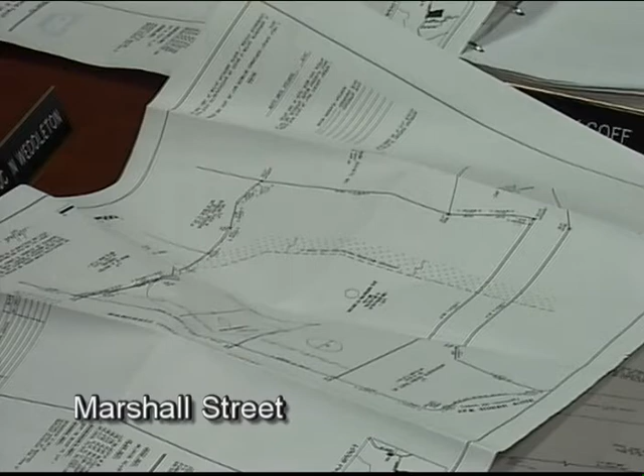We're asking for a special permit for Lot 1 as an estate lot under Section E2H of the zoning bylaw. As the board knows, an estate lot requires 3 times the minimum lot size, which in this case is 165,000 square feet of land. We're providing over 186,000 square feet, and at least 50 feet of frontage must be provided, and we're providing over 153 feet of frontage.

As you can see on the plan, there is no building location. The reason is Lot 1, the estate lot, is under agreement with the Audubon Society to be purchased as part gift, part sale from the Grays to Audubon. Once Audubon purchases the lot, there's going to be a restriction placed on it for the benefit of the town that does not allow any buildings on the lot, so we haven't shown any buildings on the estate lot.

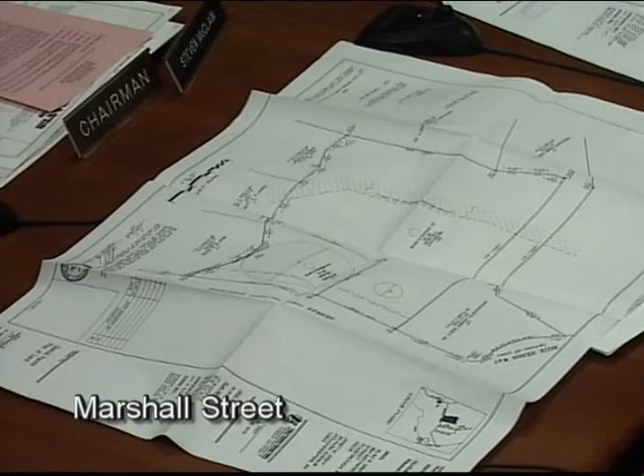So the setback requirements and things like that are not being shown. There's no wetlands on either of those lots, and the required circle and access would be off of the frontage. But again, no building will be on that lot.

Gino, do they have to create an estate lot, or can they just create a parcel to sell? Yeah, good question. They need to create an estate lot because to create the value that's going to be the partial gift to Audubon. That's the reason for creating it. That was my very first question on this, that exact same thing.

That's correct. Originally, when we were looking at this parcel, we could have done two ANR lots with 200 feet of frontage going right back, but Audubon wanted as much land as possible. So as you can see, the ANR lot, the conforming lot, has about the minimum amount of area it needs and plenty of frontage. We're trying to give Audubon as much of the land as possible, and to do that, the estate lot is...

Does that other lot comply with zoning? It does, yes. Anyone have any questions?

Was this at the town meeting? This land? Yeah. You used community preservation funds? Audubon's here. Here's a familiar face - Charlie Wyman with Mass Audubon. So town meeting, yes, very generously voted to purchase a conservation restriction on this property almost a year and a half ago now, or a year and 3 months.

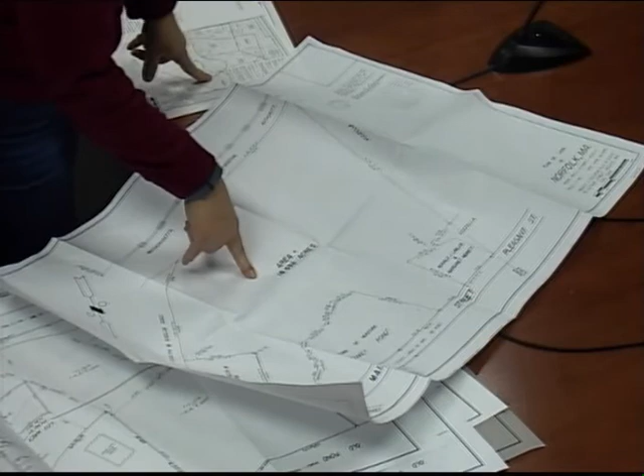This property here is under consideration for community preservation funds. You recognize this location? This property is owned by these people right here. And you talked to them about putting in, Gino, a cul-de-sac possibility. They thought they might be able to get 8 lots. But the cul-de-sac has to be 500 feet, and I didn't think 8 lots was gonna be possible.

So I was wondering if you guys could sketch an approvable plan, what zoning would require, so that we could give it to the appraiser as what would meet zoning. Unfortunately, there's 300 feet just to get the roadway in to the cul-de-sac, and there's no room for lots on either side, so you've got a cul-de-sac with 3 lots around it. It's okay, because it's only a plan for highest and best use. Yeah, we can sketch something out.

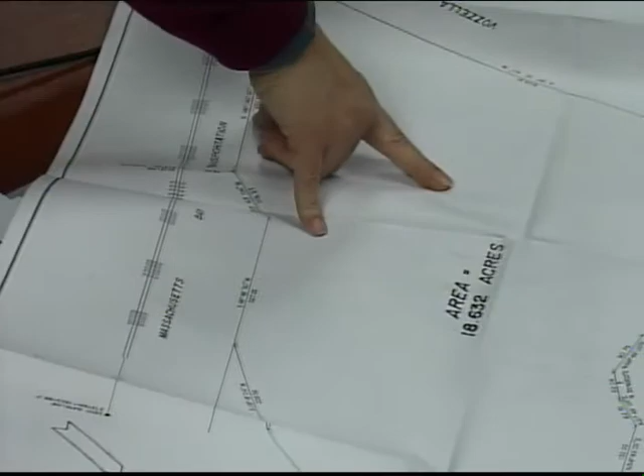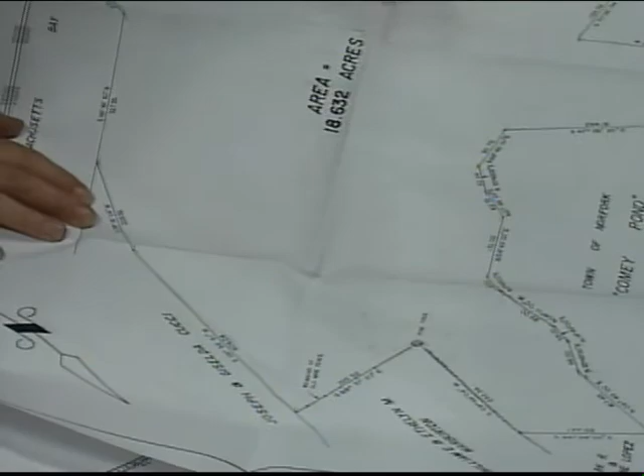Is this the seller? This is the seller. If that seller has sold some of that land too, along with that, now you have a whole loop potential. This is the Franklin Town Line. And the Community Preservation Committee can't recommend purchase across the town line. It won't affect the lots, but there is an interest in this owner to have shared use of any drive that comes in, and to keep maybe a piece over here on a diagonal, but I don't think that will affect what I'm asking you to do, which is highest and best use.

But even if you can't purchase the portion in Franklin, a development plan could extend into Franklin, and so you may be able to get more lots in the Norfolk portion. Okay, but you can't do a what-if. If you're appraising this land without that Franklin land, you can't do a what-if. Well, that's true. So you're stuck.

You gave an email to Cindy Andrade that showed the GIS assessors overlay on top of not such good topo, but something. It was USGS quad. So you'll have this assessor's lot boundary? No, we'd have to get it from Franklin if we could. Oh, but it's on MassGIS. Yeah, that's true.

If you could use this land in your appraisal GIS, you could put a road coming in like that and have a 500-foot cul-de-sac going off the side. So it's really, we've walked it, it's a really nice property. If you want to walk it, Cindy will get permission from the landowner, have you go out, but this is narrower than it appears, because this distance here goes to a culvert. There's a stream here, and there looks like a flat area in here that is either bordering vegetated wetland or land subject to flooding. So the drive has to be kind of narrow and on this side.

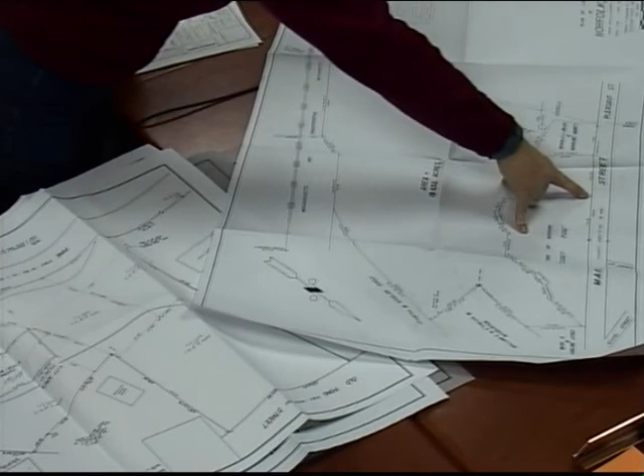Is that a perennial stream? This one is, yeah. That would theoretically not be buildable. Well, that's pretty important. Yeah, because you've got to stay 200 feet from the river, and you only have a 500-foot cul-de-sac, you have nothing. So it's not buildable. I didn't know that. Do you have this electronically, or is it just paper? Paper, sorry.

Do you want to leave this? Yes, for you. All you have to do is say yes, buddy, and you get it. Yes, thank you. You can give me the results, or Cindy will. Oh, I know what you're saying now. This was like 10 years ago. No, I'm not that old. Yeah, a different developer, maybe 1995, maybe more than 20 years ago. You're certainly not that old.